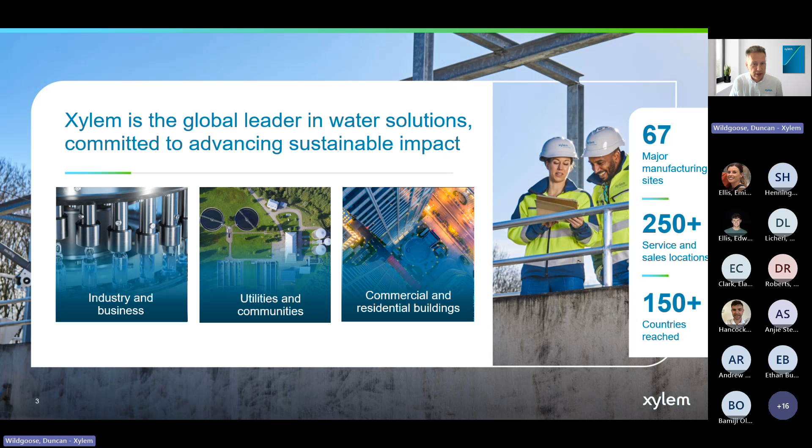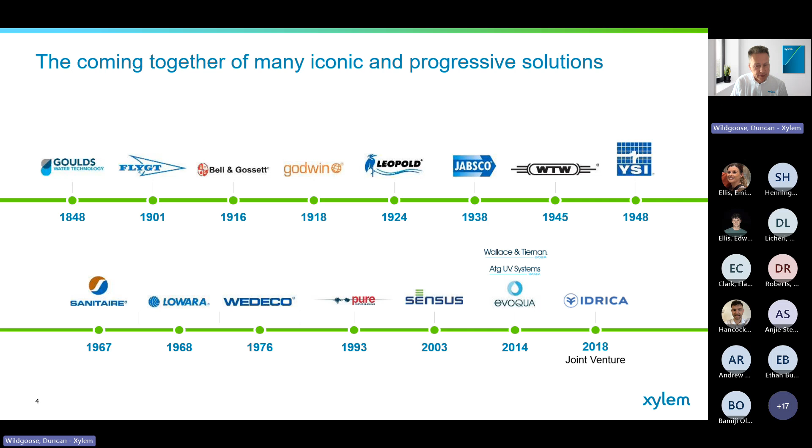This slide I always like, it gives a bit of historical context to who Xylem are. Although Xylem was only founded in 2011 as its own entity, some of the brands you'll be familiar with have been around since the earliest one, Goulds, in 1848, and have their own heritage. So they're trusted brands like Flygt, Sanitaire, YSI, Wedeco, among others, and some of the more recent partners and companies we've acquired like Sensus and Evoqua have accelerated our own transformation to provide advanced technology solutions for the sector. Xylem is now one of the leading water technology providers in the environmental sector. So hopefully that gives you a bit of context of where Xylem sit and some of the brands associated and what sits behind us that you may be more familiar with.

And picking up particularly on phosphorus: wastewater treatment works have to ensure they meet all incoming wastewater to the regulatory standards, even at peak flow conditions. But phosphorus is key, and the Environment Act drives a reduction of total phosphorus to rivers by 50% by 2028. So water utilities have to balance a number of things: regulatory requirements, operational efficiency, and financial considerations, while ensuring that the nutrient removal processes established are both effective and sustainable. So moving forward, that's been a journey that's involved advanced technologies, effective process management of your existing assets and additional assets, and proper strategic planning.

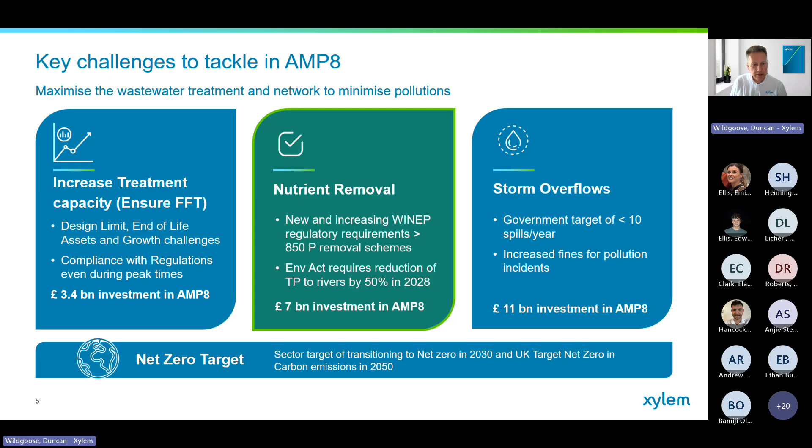So, P removal challenges. With the WINEP programme, which has obviously been in place for the last AMP and the back end of AMP6, it started to become known. We've had an ever increasing drive to remove phosphorus as the key nutrient challenge to river health and environmental health. That challenge has got tighter and tighter, so you're seeing much more this AMP - a lot of consents that are under 0.3 and below. There's been a steady move from early consents that were at 1, 0.8, 0.7, but there's been a steady march encompassing more treatment works, even down to small flows now and large flows. So that's a key challenge.

Another part is utilities needing to reduce the amount of build and assets they keep building, so if you can reutilize assets, that's great. Works are already struggling sometimes with capacity, and if you have excessive amounts of backwash, that's part of a tertiary process, that can be a limiting factor. And then there's the ongoing chemical consumption challenge which comes with phosphorus removal, where you need to add either a ferric or alum salt to precipitate out your phosphorus. That's an ongoing cost, an ongoing challenge that needs to be addressed, and trying to minimize that is a key part of the strategy.

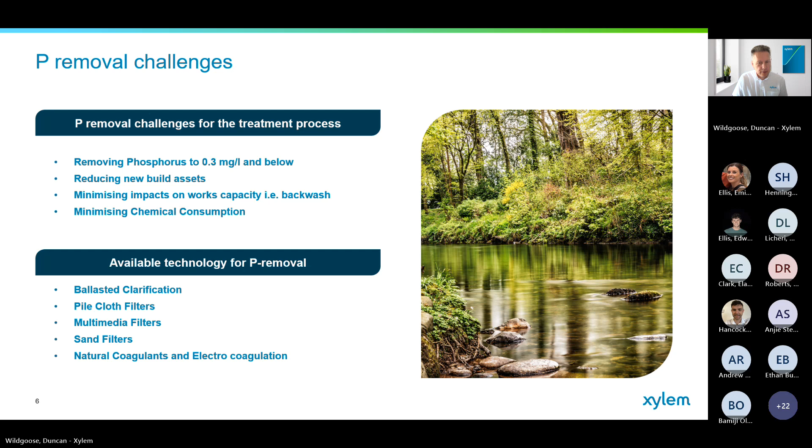So getting some real insight into ballasted clarification. There's two parts to the technology we have, and they both use something called magnetite, which I'll talk about in a minute. One is called BioMag, and one is called CoMag, and they have a different purpose. They're sister technologies in the fact they both use magnetite as a ballasting agent. But BioMag is more around increasing and giving the ability to increase treatment capacity within your existing tankage, while also being able to achieve ENR standards without potentially tertiary filtration or tertiary stages.

That leads into the concept that you can reduce costs because you're not having to build lots of new assets. With that technology, we're treating about 1,000 megalitres per day globally.

CoMag is a tertiary process primarily for phosphorus removal, and has been the prime driver in the UK and in the US, but also on storm treatment in the US, and in Norway we're building a large plant. There is real potential in the UK, but that requires some work on the legislation to enable it to happen.

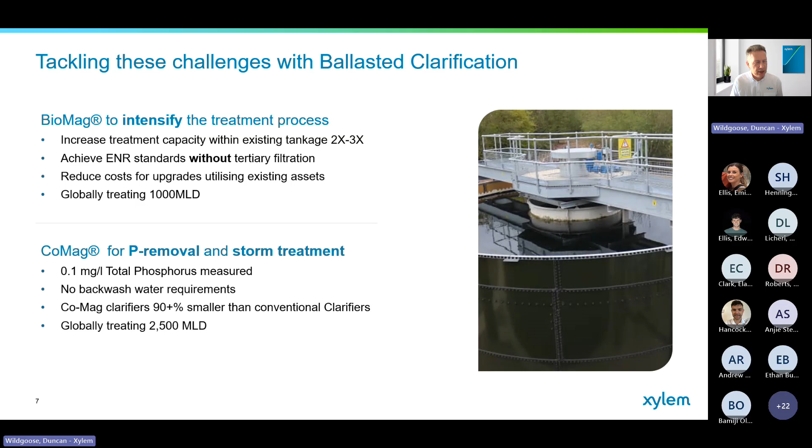You can achieve very tight phosphorus consents with CoMag and ballasted clarification. One key thing is you have no backwash water requirements, and the clarifiers are ultimately much, much smaller than conventional, as I'll show. We're treating about 2,500 megalitres per day with this technology globally.

The fundamental element key to the process for both BioMag and CoMag is magnetite, which is an iron oxide, Fe3O4. Fundamentally it's the same product, but a different grade. It's an aggregate that's mined.

For BioMag, it uses a smaller grade, about 10 microns, which embeds into the biological floc. Whereas CoMag is around 50 microns nominal size, and you can have bigger solids particles with the chemical flocs. Hence the settlement rates with CoMag are much faster in the clarifier stage than with BioMag.

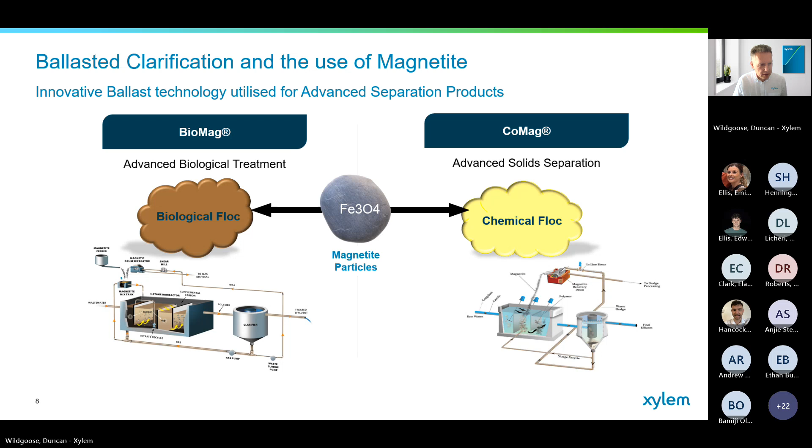A bit more about magnetite, which is the key ballast. It's a fully oxidized iron ore, so it's very inert. It's a mined product available from multiple sources globally - it's not one of these that has only a few countries. In Europe, most of it comes from Sweden and Norway, where they have very large long-term deposits.

It's used in a wide range of applications, and water use in this application is quite small compared to some of the other industrial applications. With that, it's relatively inexpensive, and it hasn't moved a lot even in the last few years when there's been quite a lot of escalation in a lot of things. We're still around the order of 50p per kilo.

As I say, it's completely inert. It's got a very dense specific gravity, but one of the key elements is it's very magnetically retrievable. That links into how it actually gets utilized in the CoMag and BioMag technology.

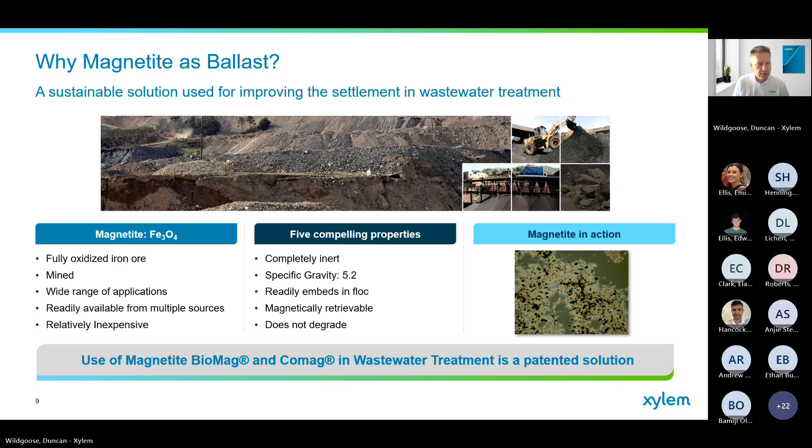As it goes through, once it gets to the 3rd tank, that's where you add the magnetite. Sometimes in the 4th tank, at higher flows or peaks, you add polymer to assist with the settlement and bringing it together.

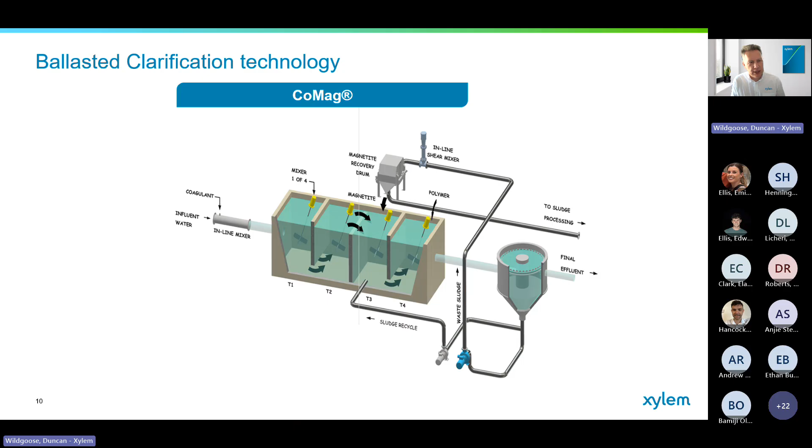I'll go through how it's applied just to make it a bit clearer, hopefully. So we have coagulant dosed up front into the static mixer, as I said, and then you come into the reaction tanks.

If I toggle forward, you'll see we have a sludge recycle loop, and that adds a number of benefits, both in terms of helping to reduce the consumption of chemicals, and also to improve the contact time within the system.

On the recycle sludge line, you have a waste sludge line, and that's where the magnetite recovery is fitted. Once you've recovered the magnetite, you return that into tank 3, where your original fresh magnetite was added at the start and is topped up. Then the waste solids is removed to your standard sludge treatment system.

So we get an ability then, by utilizing the magnetite, the clarifiers are much, much smaller - if you're not actually utilizing existing humus tanks or other tanks, and if you're building new clarifiers specifically, they're much, much smaller, up to 90%. That's because the rise rates are much, much higher - it settles, basically drops like a stone.

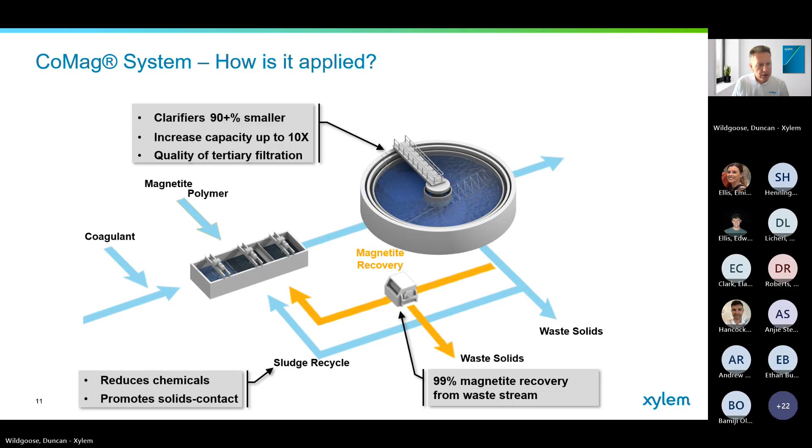So this is a nice little, very short demo of what's going on, visualizing it if you've never seen one. I know it's showing 3 tanks, but the first tank is usually split into 2 normally. The 3rd tank is where you add the magnetite, and you can see that happening. I'll just play it again.

And that's the recovered magnetite after the mag drum, and then you can see a visualization in the clarifier of the magnetite and the sludge settling, and it is very quick. It just drops. As I say, it's not a conventional idea where you have a sludge blanket, with the CoMag system.

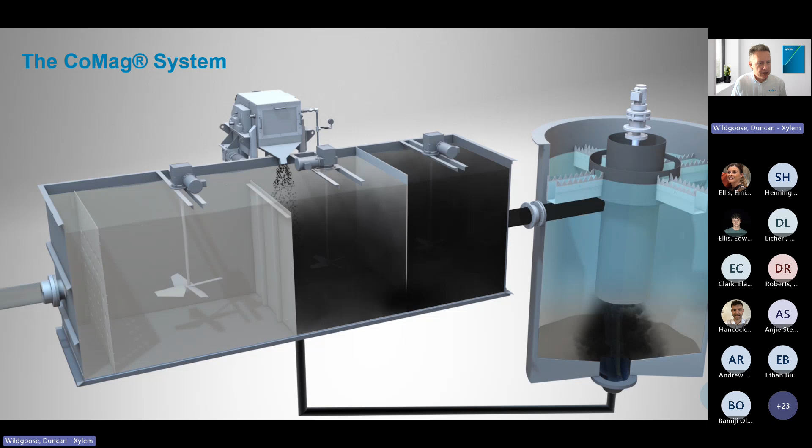So where is it applied? It's typically applied in tertiary application, particularly for phosphorus removal, as we talk about. Also on stormwater treatment. We've also been looking at trials on primary treatment and seeing how that can enhance that process. But it's also, again, a very big topic for this AMP into the next, about water reuse and water scarcity that we have.

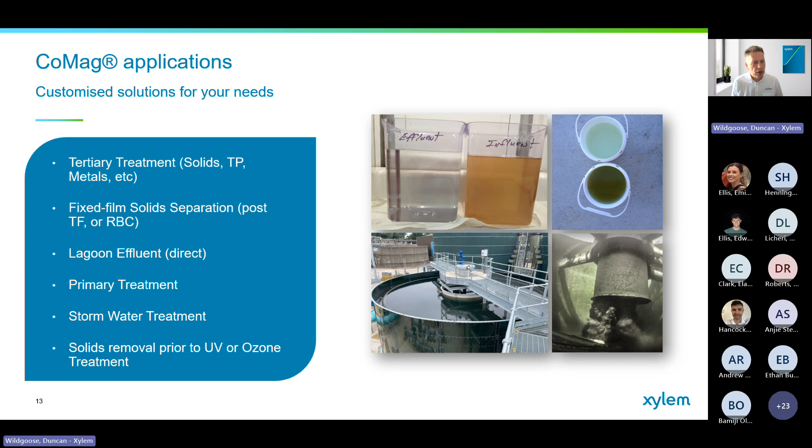There's a number of projects in the RAPID program, using ballasted clarification up front of UV and ozone on flows is a great method, because one of the benefits of ballasted clarification as opposed to filtration systems is that they're quite tolerant of high solids loading and peaks in the solids loading coming in without getting into a never-ending cycle of backwash challenges. So ballasted clarification typically is much more tolerant of higher solids loadings and peaking in that.

BioMag, talk a bit about that now, is applied into activated sludge systems or oxidation ditch, where you apply with a magnetite makeup tank into the activated sludge itself, and then you use the existing final tanks typically to settle out. And then you use the standard RAS circulation system that's already there. And on the waste sludge line, again, you fit your magnetite recovery system to pull that out before your waste sludge then goes off to processing.

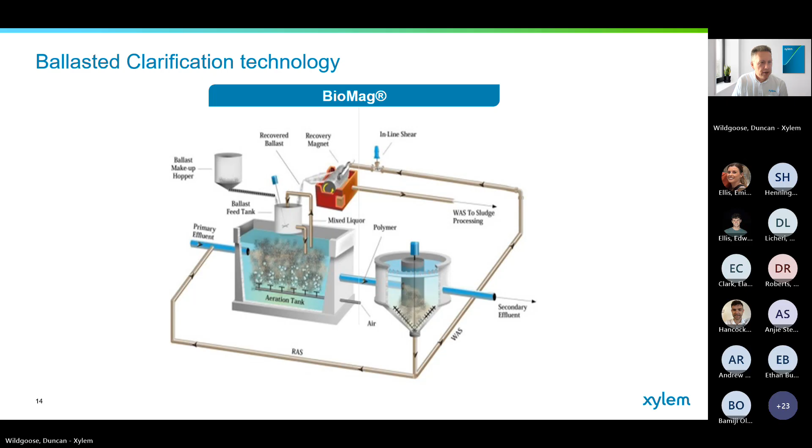So with the CoMag, just a brief note I forgot to mention, the recycle rates are something like 5 to 10% of the flow.

So with a BioMag system, what are you doing? So a common problem is you have an existing ASP system of some form. It's operating maybe at 3,000 milligrams per litre or similar, and you have a final tank or a couple, and you've got a flow of Q. You've got a requirement that growth is making you want twice that. Can we just put 2Q through that system? The real challenge often is, well, if you raise the mixed liquors, we're going to get blanket carryover in our clarifiers and failure. They're the bottleneck, the clarifiers.

Conventional wisdom, or approaches over the years, has been well, we'll just increase the capacity by adding an additional mirror image of what we've got, and then we'll achieve 2Q.

An alternative to that is utilizing something like BioMag. So you dose the BioMag into your activated sludge. By doing that, you can then settle out with the existing clarifiers because you have settlement rates of 2 to 4 meters an hour. So you get a doubling to trebling of your capacity in your clarifier. And by doing that, you can raise the associated mixed liquor in your basin, which gives you the increased treatment capacity available. You reutilize the existing RAS lines. There might be a slight modification to the pumps or a check on that. And then there'll be on the waste sludge line, again, you'll fit your magnetite recovery system before the waste sludge is then taken away.

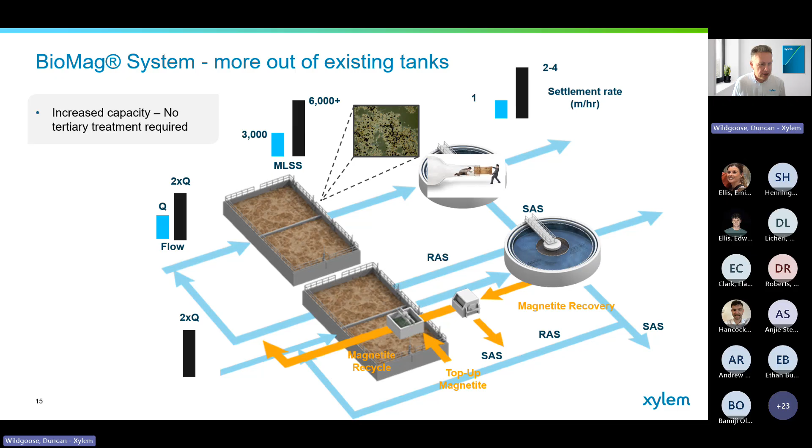Another little video just giving some sort of impression of the system. So you have a pictorial view there of the silos. That's a typical storage silo. So on larger sites with BioMag or CoMag, you have a silo for the magnetite, which is delivered, air blown in from tankers. And then that's fed into your magnetite makeup tank, you see, which has a mag drum recovery system on top of it. Enters into your activated sludge plant and then through into your clarifiers.

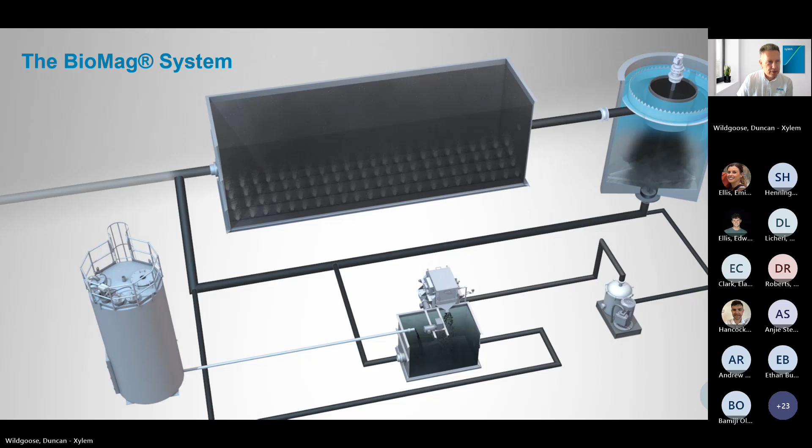This is a short video to demonstrate the improvement in settling that can be achieved with BioMag, in comparison against an activated sludge from the same site. So one on the left is a conventional activated sludge, and the one on the right is the activated sludge with some magnetite added, to give you an indication of the settling rates and what happens. So just keep your eye on the clock and you'll see how, with the additional weight of the BioMag and the density, it significantly speeds up the settlement.

So this is what aids you in overcoming this bottleneck effect on your clarifiers. You can also see from the clarity of the top water level above the sludge and the solids, it's much clearer, even just after 6.5 minutes there, which reflects the improvement of effluent quality that is achieved by BioMag treatment.

One of the fundamental things when looking at BioMag, and obviously the reutilization of the final tanks, is the analysis of the existing clarifiers. The fundamental drive is to do a state point analysis to understand your required clarifier surface area and see if they're suitable. That's obviously a key element of the BioMag design.

A few key things we look at: we happily come to sites, and we do quite often, to do settling tests. We've done over 1,200 settling tests to look at Vesilind coefficients, a parameter where a conventional Vesilind coefficient is often around 6.5, and with BioMag you're typically doubling that. But that's a key consideration.

So things like the existing sidewall depths are part of it, the slope, and a full analysis. We do a full modelling analysis of the clarifiers to understand their suitability and how much we can actually raise the potential capacity of the system.

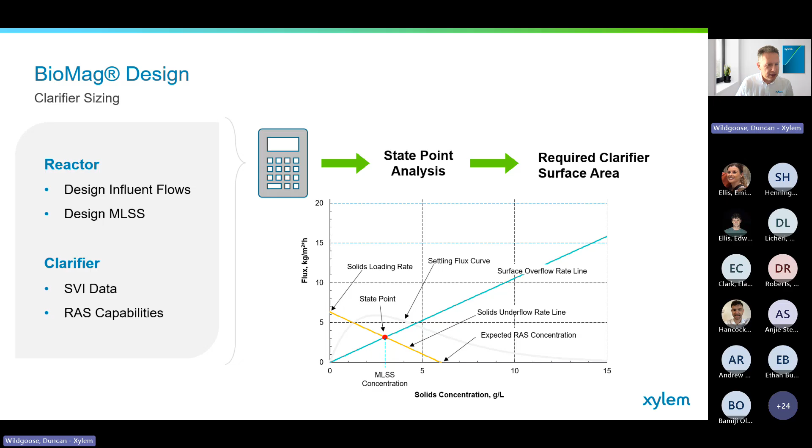Some of the key takeaways: BioMag gives you the opportunity to increase your treatment capacity within the existing tankage between 2 to 3 times, depending on specifics of the site. At the same time, you can drive and achieve low ENR standards without tertiary stages. We typically say we can get down to 0.25 to 0.3 milligrams per litre with BioMag without having to have a tertiary stage in terms of total phosphorus.

So that hits quite a lot of sites' requirements and a lot of the challenges that are there. That ultimately leads to less capital costs for your upgrades if you're not having to build new assets and groundworks, etc. Typically BioMag will help improve performance and manage, helping support wet weather flow challenges.

I will say it won't solve all your problems. If you have an activated sludge that is biologically poor and not great before you start, it's not going to suddenly magic and make the biology that much better. There's still the standard biological rigor you have to go through to improve your biology. It gives you some help, but it won't solve that challenge if you have poor performing and poor floc formation on site.

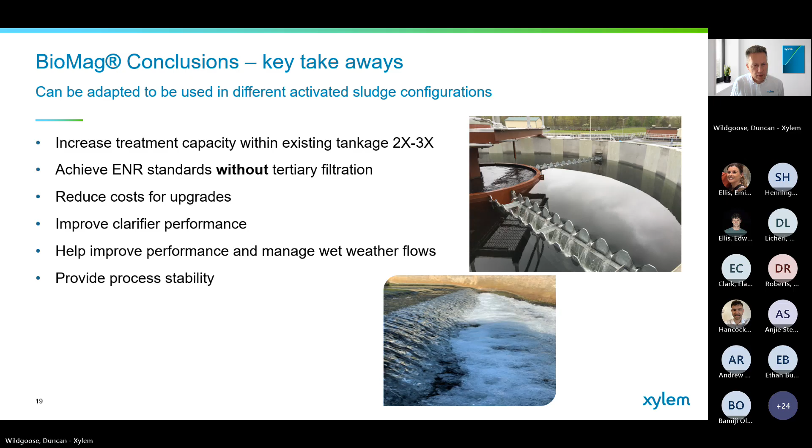So moving on to a key part of the system for both CoMag and BioMag is the recovery of the magnetite, to maintain your magnetite in the system and not just let it disappear with your waste sludge.

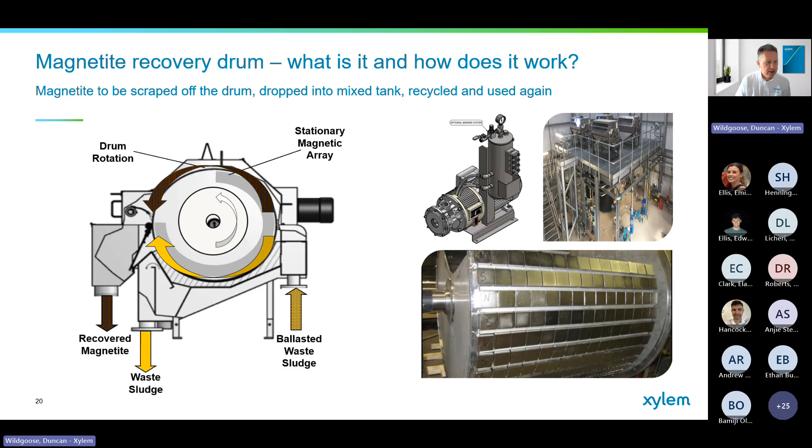That is then moved and scraped, with rubber scrapers against the drum, into the recovered magnetite, which drops back into reaction tank 3 in the case of CoMag, and back into the magnetite makeup tank in the case of BioMag. Then the underflow, with the magnetite removed, is the waste sludge, which goes out on the underflow of the drum and then out through the port at the bottom. Hopefully that gives you a view.

So the technology, CoMag and BioMag, came from the States, through Evoqua Technology, who bought the technology about 10 years ago. It came into Xylem's realm when Evoqua were acquired 2.5 to 3 years ago.

There's a lot of references in the States, but I'm just focusing on the UK references, which have really taken off in the last 6 or 7 years under the WINEP program and the challenge from phosphorus removal. So you can see there's a bit of color coding - I'm slightly colorblind with some of these, so apologies. Lime green are the early pilot trials, which I won't go into detail. We have blue, which is Ruthin, Lletty Brongu, and Mossley - they're all CoMags, quite small flows, on trickling filter works where we're utilising the existing humus tanks, and all we're fitting is some new reaction tanks.

Then the light blue are all the CoMags, and you can see some quite large sites, like Knostrop, which is the largest globally along with Blackburn Meadows at the moment. Blackburn Meadows is around 4,500 litres a second. Knostrop treats around - we'll talk more of that in detail in a minute. The first CoMag plant at scale that was built was Finham in Severn Trent, and we'll talk a little about that in a minute. The first BioMag was at Rugby in Severn Trent, and these grey elements are BioMags. There's one in UU at Horwich, operating for 3 years now as well. Burnley has just been commissioned and is online now.

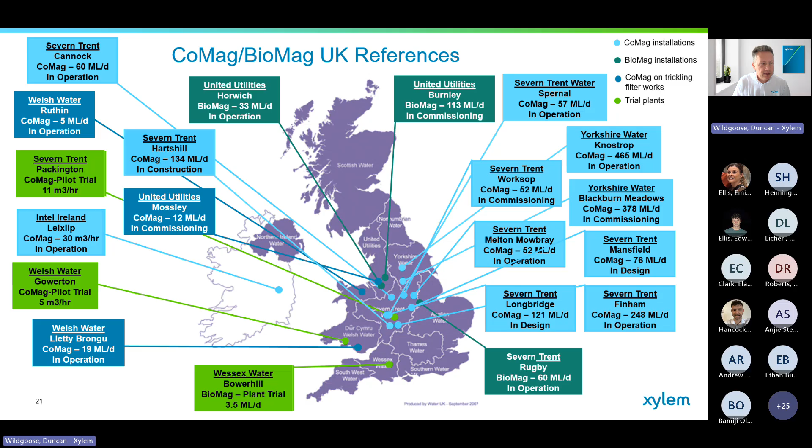So you see there's quite a range, and there's quite a number now already in operation or in final stages. Some are in design for this AMP. We're looking at a few more.

So all the flow goes through the 12 ASP lanes, 12 final settlement tanks, and that gets passed forward to where the CoMag plant is. The effective area of the two CoMag clarifiers we've got here, which are two 75% capacity CoMag clarifiers, taking 150% of the flow that all those 12, potentially, all those 12 tanks would handle. So the area it takes up is massively less. And then up front with the reaction tanks.

The reaction tanks here at Finham - part of the benefit for Severn Trent was that they had an old RGF plant, which basically they'd turned off after a year, hadn't operated for about 15 years. So it was an asset sat there doing nothing. We managed to reutilize the reaction tanks, reutilize the RGFs as the reaction tanks. So we converted some of the old RGF cells.

So that was a great use for an old asset. They're not the ideal aspect ratios, because there's certain aspect ratios of the reaction tanks in terms of height to width and length that you want to ideally have, and they're not perfect, but they were good enough. So that was a great positive for the system.

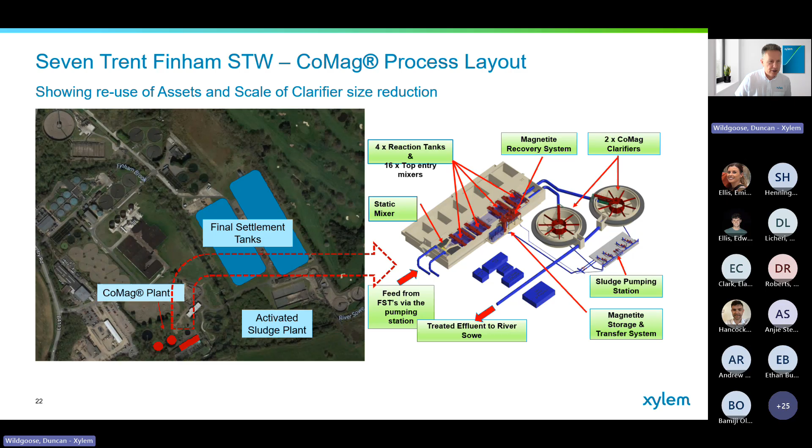So Knostrop, I briefly mentioned it before on the references. This is a site that was built in the last AMP on a largest works. Knostrop is Leeds, so it's treating 75% of the flow there, using just one clarifier, getting down to under 0.25. We can get lower, but they're blending. Their consent overall is 0.4.

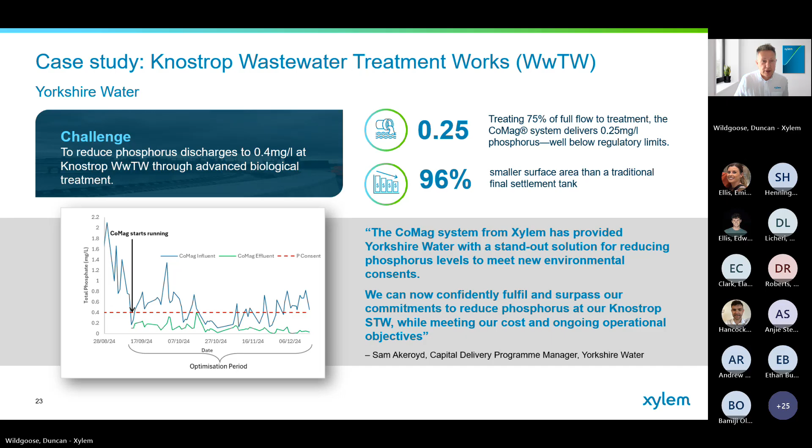Great results. Here, if we look at some pictures from CoMag installations, it gives you a bit of context. The one in the center at the top, that's the Knostrop clarifier, taking 75% of all the flow going through Knostrop.

You'll see, which is typical for a lot of CoMag clarifiers, that we often need radial launders, which are the ones centered to the outer perimeter, and then the traditional peripheral launders. That's just because the volume of the flow needs more weir length to be able to discharge that liquid. The picture underneath is the two clarifiers at Finham.

As I say, typically most CoMag installations go down the route of utilizing 2 at 50% or 2 at 75% clarifiers, but it's down to the client's requirements and requests. The picture at the top right is a magnetite silo.

As I say, that's tanker delivered and airlifted, blown into the top of the tank, then fed automated into the system. On smaller sites, we sometimes just have manual makeup systems for magnetite top-up. You can see on the top left, magnetite recovery drums - they're externally mounted, don't need to be in a building, just on the access platforms.

And the little picture, that's the small plant at Ruthin, where they had small stainless steel reaction tanks. On the right is Llety Brongu, where we use the existing humus tanks on both those sites - they're the reaction tanks, which are Forbes GRP type tanks, and we use them quite a lot. A lot of sites have that concept.

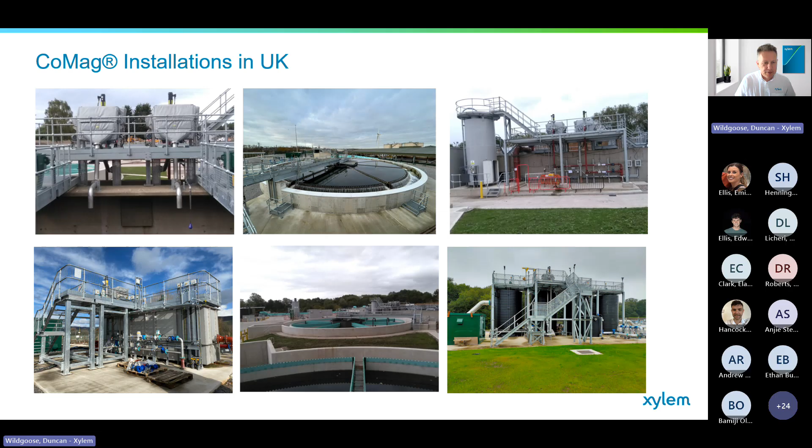It's a bit of data on a site from Upper Gwynedd - not Upper Gwynedd in Wales, but in Welshwater, sorry, in the US, Pennsylvania. And that shows, as an ASP plant, that we're achieving very low ammonia. We're enabling the plant and the biology with its increased capacity to treat down to very low ammonia loads. That was a question we've had on a number of plants, and that data is available through the EPA, you can see it for all the BioMag sites in the States, how well they perform.

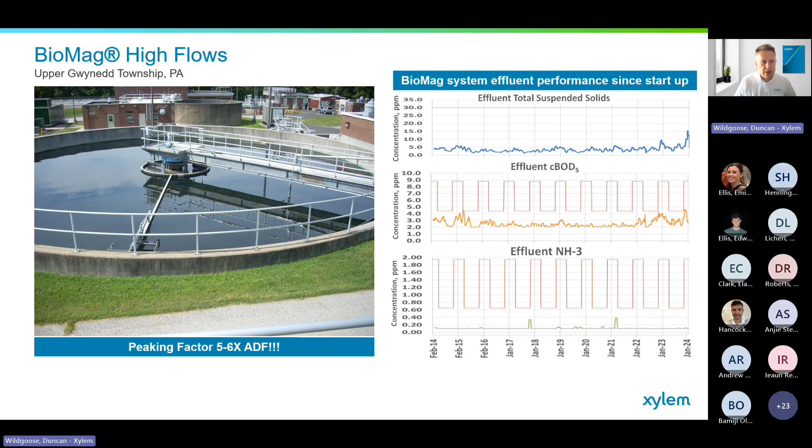In summary, BioMag CoMag can help you get down to very low levels - 0.1 with CoMag, BioMag we say down to 0.25. You can utilize existing infrastructure, both for CoMag with trickling filter works with humus tanks, and for BioMag it's the concept to use the existing tank assets. We have no backwash requirements on the clarification itself.

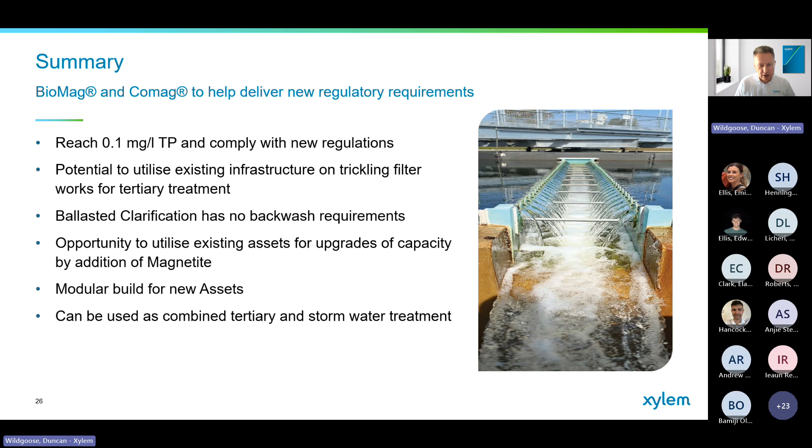We can do some parts of it as a modular build in terms of offsite, and it can be combined, CoMag, as a tertiary stormwater treatment. That's what they're doing in Norway and have done in the States, so you get two benefits out of it potentially.